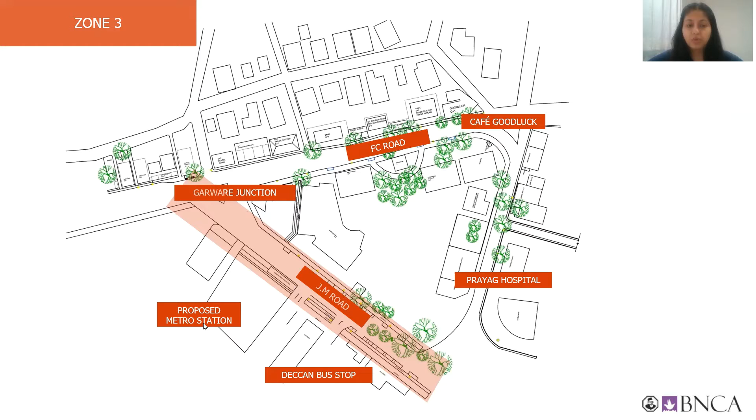This is Zone 3. This starts from the Prayag Hospital to Garware Junction or the Garware Underpass. It is mainly considering the JM Road, and the surrounding main locations are the proposed metro station and the Deccan bus stop.

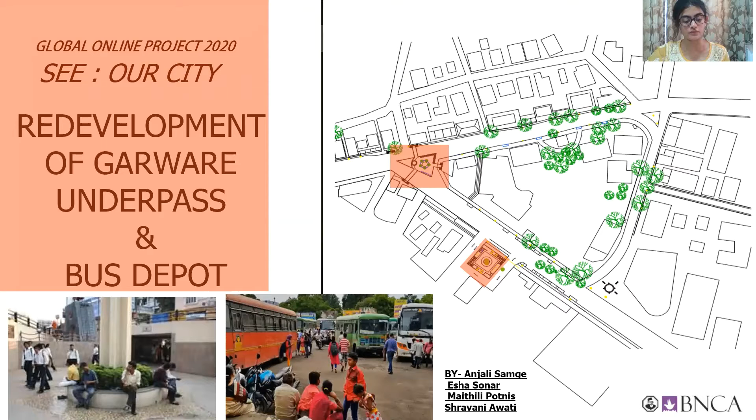Hello, I am Maithili Potnis. This video will talk about the proposition of redevelopment of Garware Underpass and the bus depot.

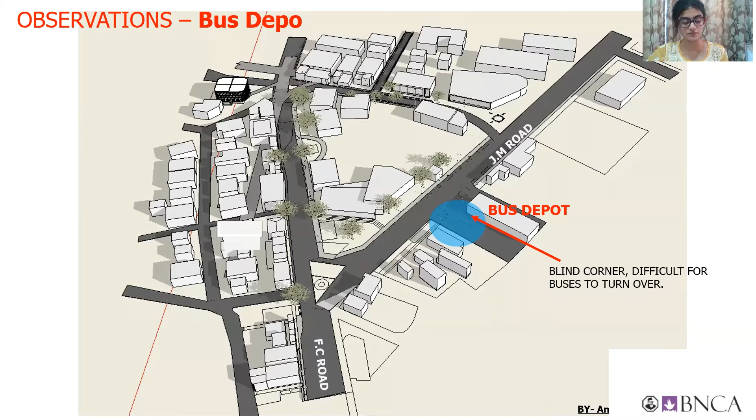Observations for the bus depot. During our site visit, we observed that there is a blind corner at the turnover, making it difficult for the buses to turn. There is no designated area for the people waiting for the bus.

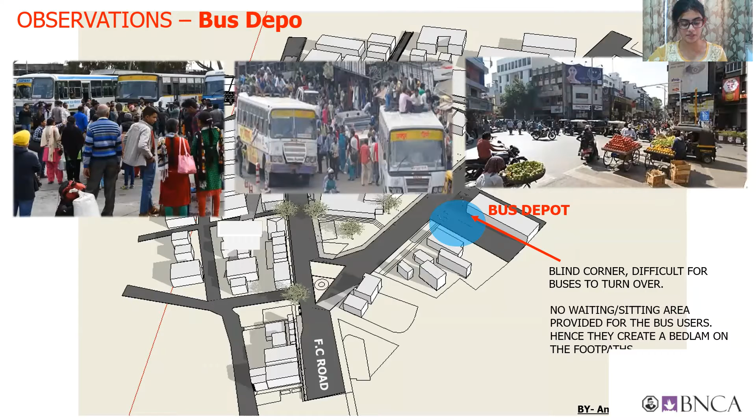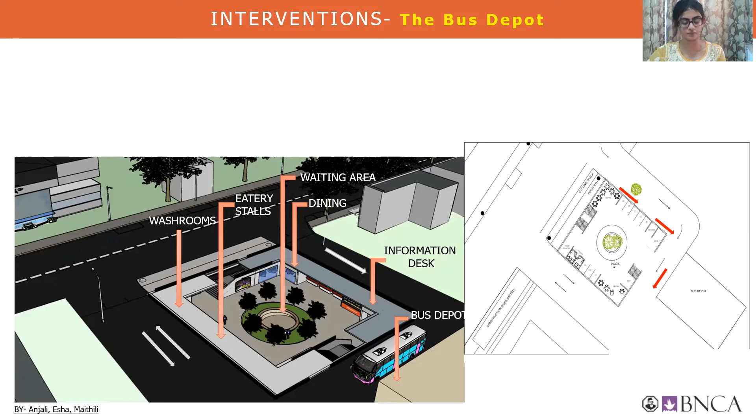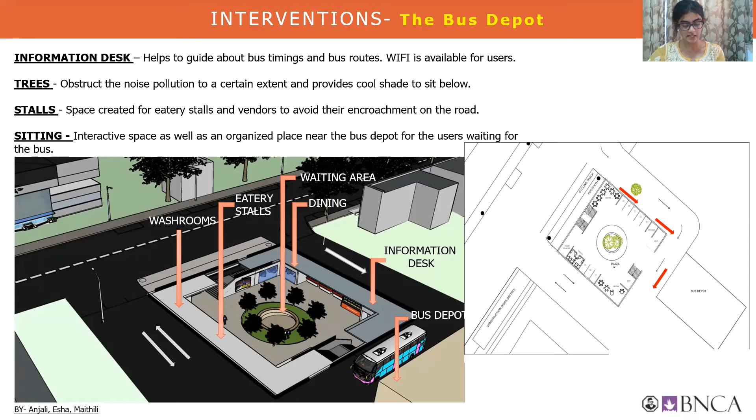The intervention for the bus depot. Creating a small square plaza helped in channelizing the circulation of the bus as well as creating a proper pause point for the pedestrians and the people waiting for the bus. Small eatery stalls and dining areas form recreational spaces. Information desks organize the timings for the buses and thus help the people to get the bus according to their convenience.

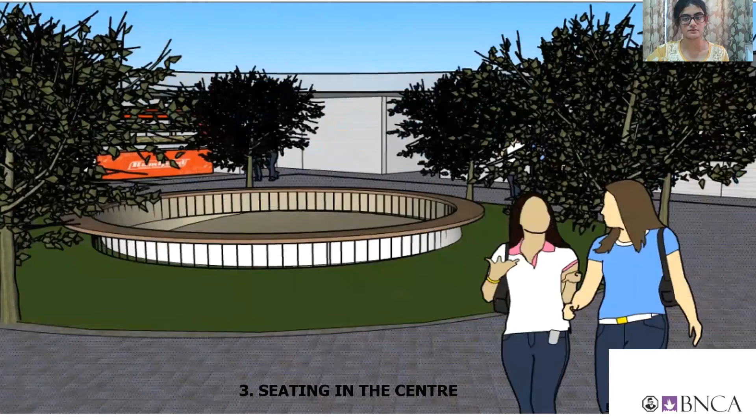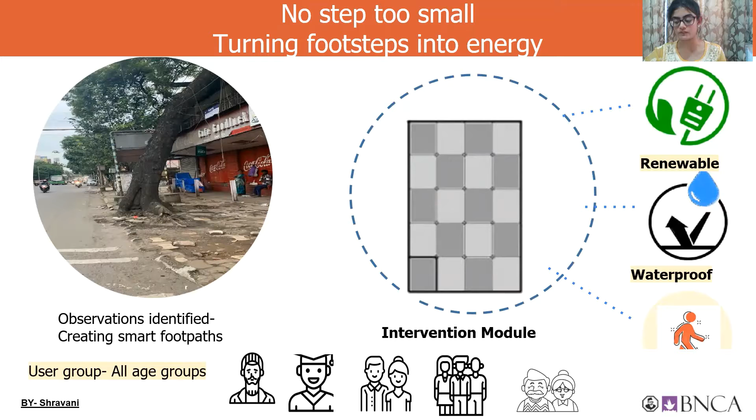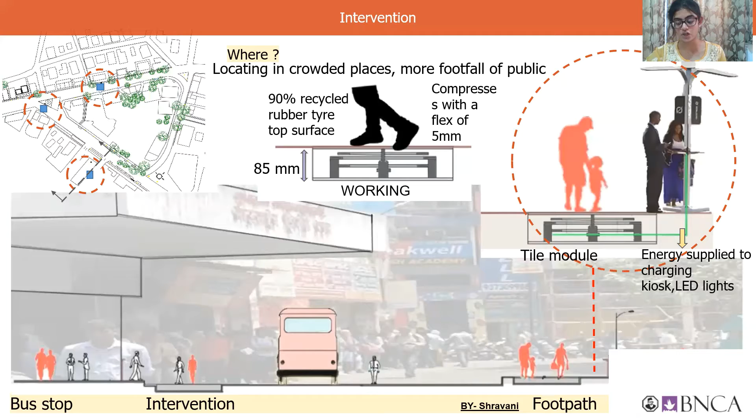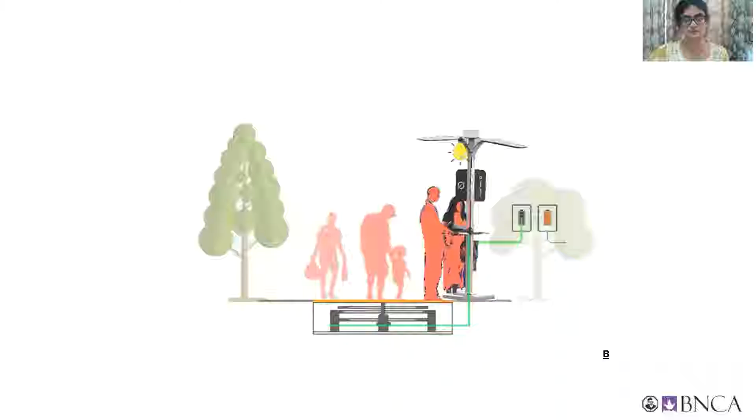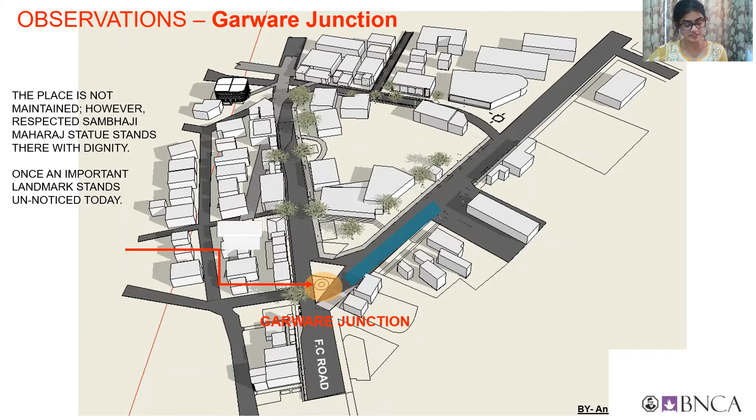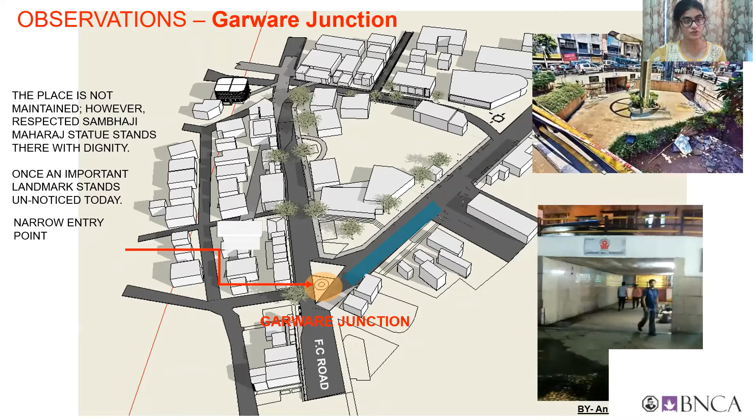Observations for the Garware Underpass. The Garware Underpass, one of the main junctions on site, was once of great importance. The statue of Sambhaji Maharaj, the son of the great Maratha warrior Shivaji Maharaj, stands there, which is overlooked today. The place is not maintained. There are extremely narrow entry points to enter the Garware Underpass. We observed the pedestrians intend to sit at this halt point, but there is no adequate space.

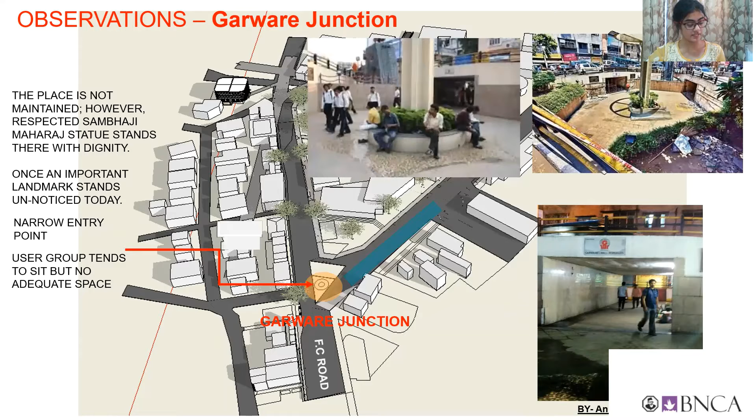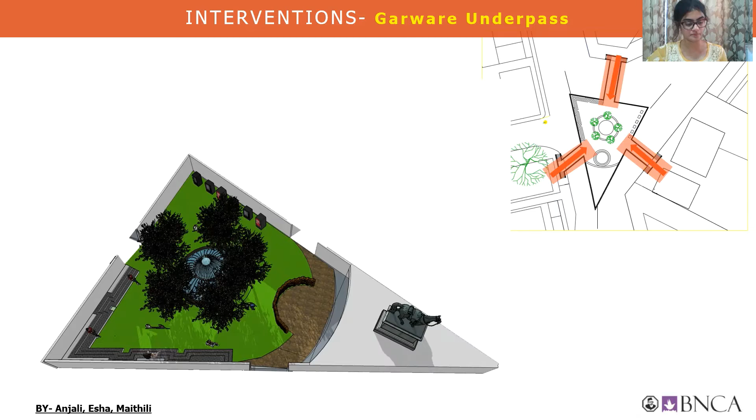Intervention for the Garware Underpass. There are 3 main existing entries to the underpass which we have proposed to widen. A person is welcomed with cool green space with a soothing noise of the fountain. One can take a halt sitting under the stepped seating that overlooks the fountain and is shaded with trees.

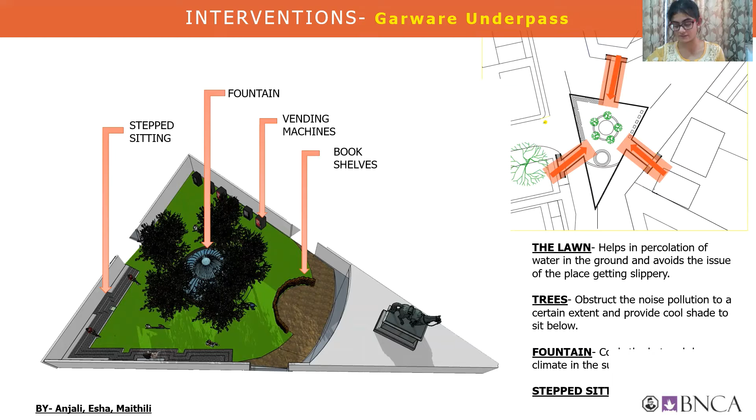In today's days of tarred roads, a small green space helps in percolation of water and the fountain cools the hot, dry climate in the surroundings. Vending machines serving beverages and bookshelves form a perfect entertainment source. Proposition for the redevelopment of the underpass.

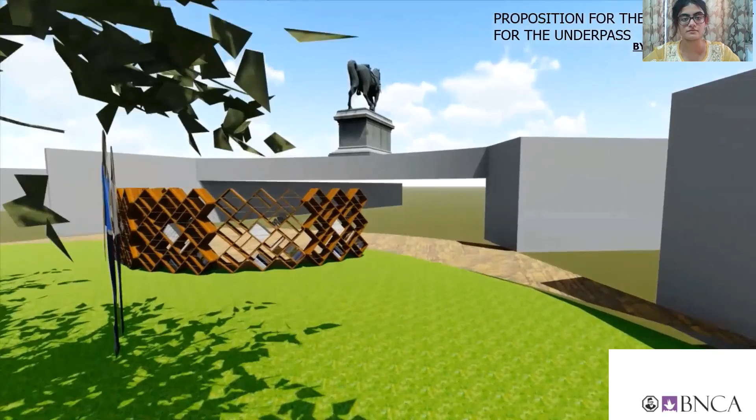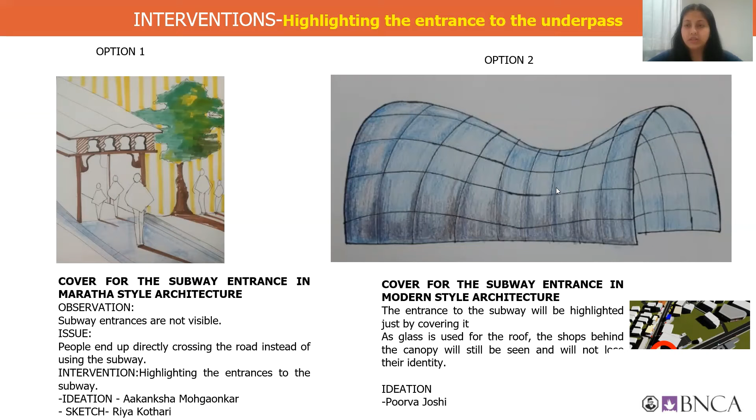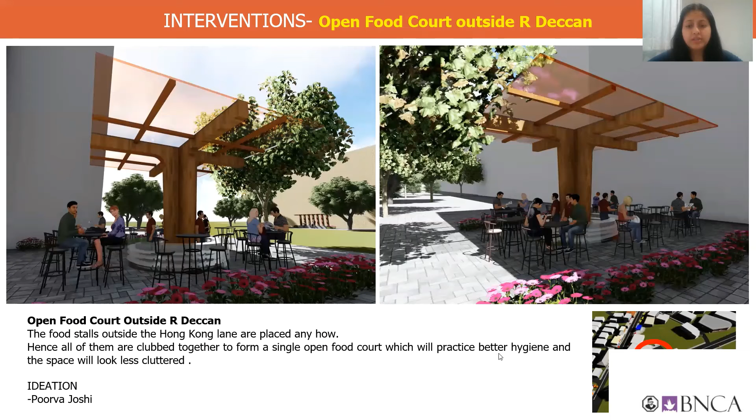Then the interventions for the open food court outside the R Deccan area. So the food stalls outside the Hong Kong lane are placed anyhow. Hence, all of them are clubbed together to form a single open food court, which will practice better hygiene and the space will look less cluttered.

Then the interventions like the covered seatings at regular intervals. So the observation was the seating has been provided, but they are not covered, because of which they are not used during the rainy season mostly. Thus, covering them will make it usable and useful.

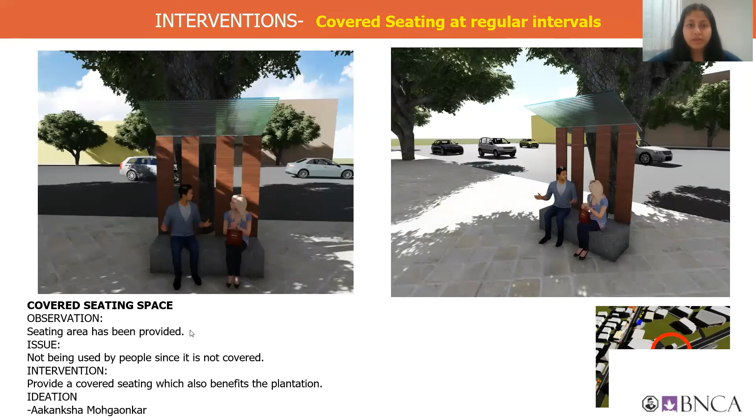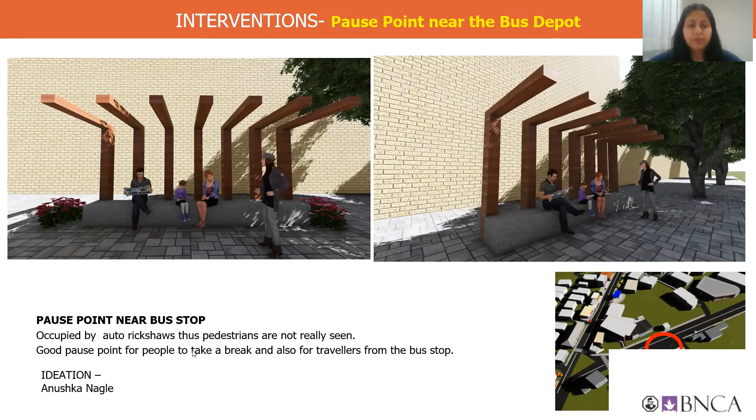Then this is the pause point near the bus depot. This part is actually occupied by auto rickshaws, and thus pedestrians are not really seen. And a good pause point for the people to take a break and also for travelers from the bus stop will be really helpful.